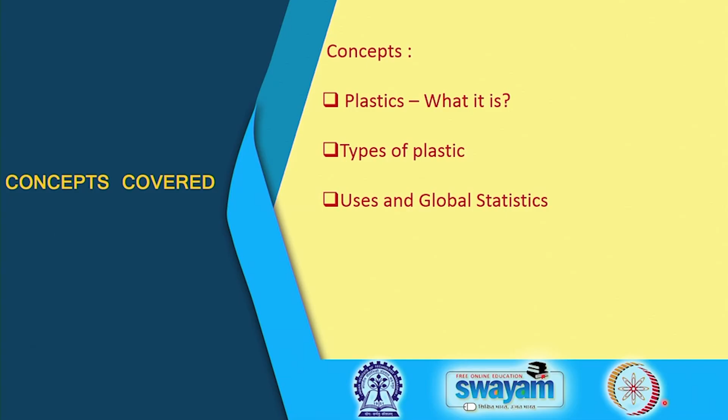So far we have talked about what plastic is, and we started looking at the types of plastic and different classifications based on usage and material. We are presently focused on types of plastic, and in this week we'll also look at usage and global statistics in the next module. This was the last slide you were looking at in the previous module.

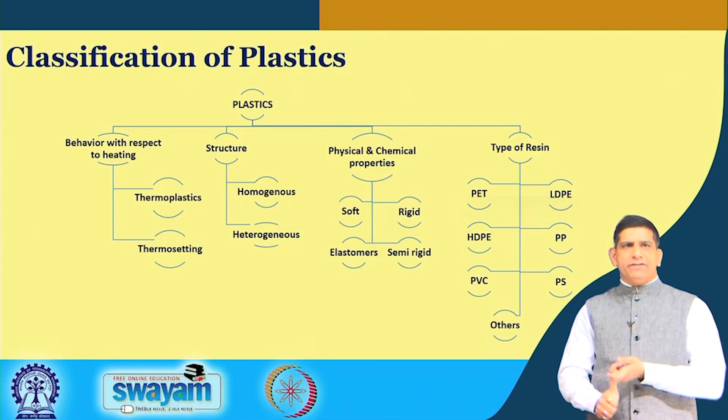When we talk about plastic, you can look at it from a heat perspective, with respect to how it reacts to heat—that's the behavior. We also talked about the structure, the physical-chemical properties, and types of resin. That's where we stopped in the previous module.

Continuing the discussion on thermal behavior: thermoplastics soften by heat and harden when cooled down. If you apply heat, it will soften, and when the heat is removed and it cools, it becomes hard again. So it can be remolded and used as many times as required.

You can remold it and use it for different applications, making different products out of it. So thermoplastics is that particular category.

Thermosetting plastic cannot be reused, so more thermoplastics in the mix is actually better for the recycling industry. Thermosetting plastic is very difficult to reuse—this variety requires great pressure and momentary heat during molding, which hardens on cooling, so you cannot really reuse it easily.

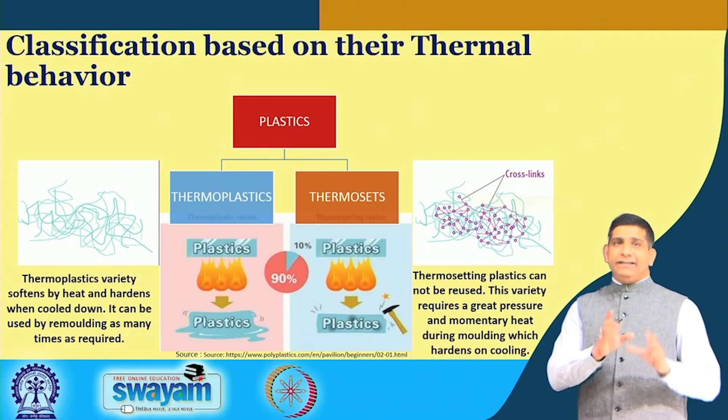Essentially, thermoset plastic can be used in waste-to-energy applications. You can reuse it within the same product, but you cannot make a new product after melting it. So thermoplastics are easy to recycle, while thermoset plastic is better suited for waste-to-energy plants. That's important when looking at different options for plastic waste management.

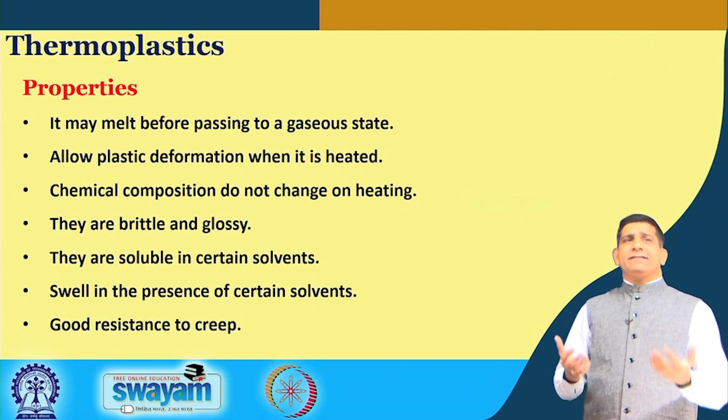Thermoplastic may melt before passing into a gaseous phase, allowing plastic deformation when heated. Chemical composition does not change; they are brittle and glossy, soluble in certain solvents, and swell in the presence of certain solvents, with good resistance to creep. So it can be remolded into different products.

It's highly recyclable, and you get a better, superior finish because of the material property, with high impact resistance. You can remold and reshape it; it has chemical resistance and comes in hard crystalline or rubbery surface options—you can make it hard or soft just by playing with the temperature during processing. It's also eco-friendly to manufacture since it can be recycled much more easily.

What are the drawbacks? It's more expensive than thermoset plastic, since it gives you so many options, and it can melt if heated. So if you're using it in a setting where things get heated up, it can potentially melt while in use—that's where you need to be careful.

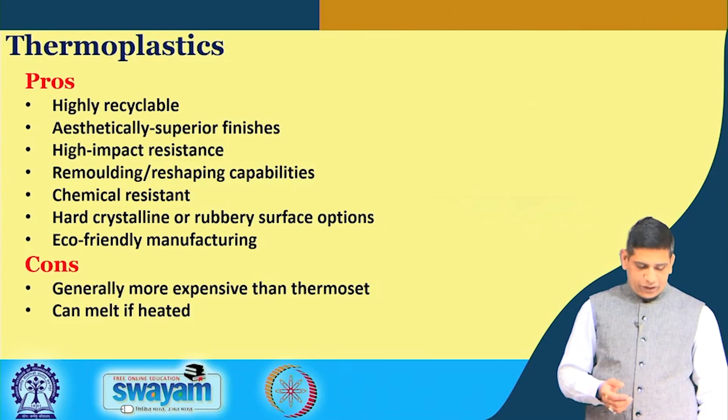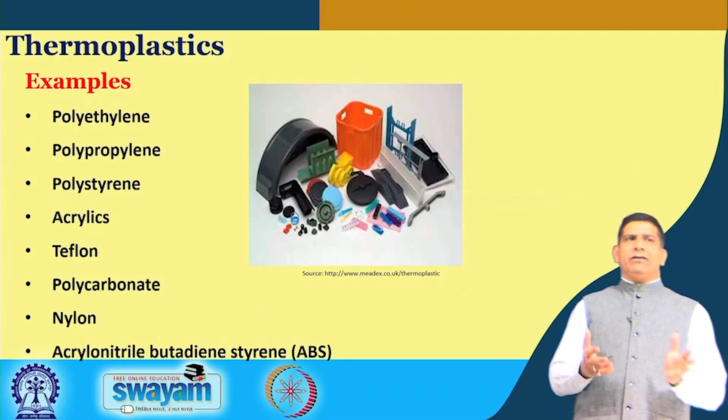Examples include polyethylene, polypropylene, polystyrene, acrylics, Teflon, polycarbonate, nylon, and ABS, which is acrylonitrile butadiene styrene. All these different materials you see are thermoplastics—that's what thermoplastics are used for.

Thermosets are soluble in alcohol and certain organic solvents when they are in the thermoplastic stage. This property is utilized for making paints and varnishes from these plastics.

They undergo an irreversible chemical process, they are durable, strong and hard. You can make beautiful colors. They are mainly used for engineering applications of plastics.

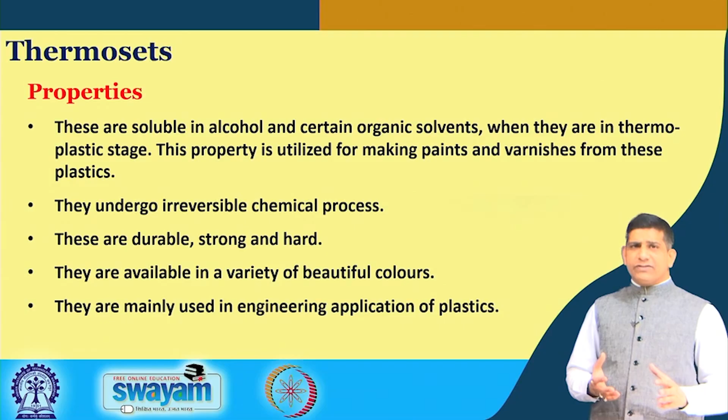So most of the engineering applications you see are mostly thermoset plastic, which is very difficult to recycle, but they are more resistant to high temperature. It will not melt, unlike thermoplastic.

It is highly flexible in design. You can design it in different ways, with thick to thin wall capability. You can make it very thick or very thin.

Excellent aesthetic, similar to before. You can make it look nice, with high levels of dimensional stability because again it does not melt, so it will not have the effect of heat. It's cost effective, relatively cheaper compared to that.

The problem with this is it cannot be recycled, so that is kind of a drawback. It's more difficult to give a good surface finish, and it cannot be remolded or reshaped. So once you've made it, that is it, you cannot really do many things with that.

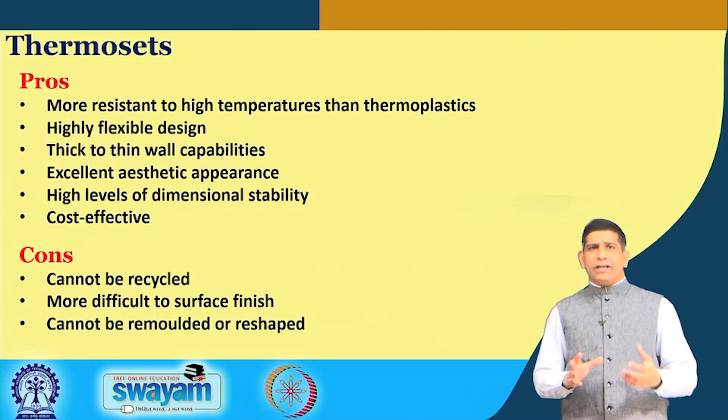That is of course the drawback, but both thermosets and thermoplastics have different kinds of applications, as you saw for thermoplastic. Similarly, for thermosets we use epoxy, polyurethane, unsaturated polyesters, phenolics, and silicone for all those different applications.

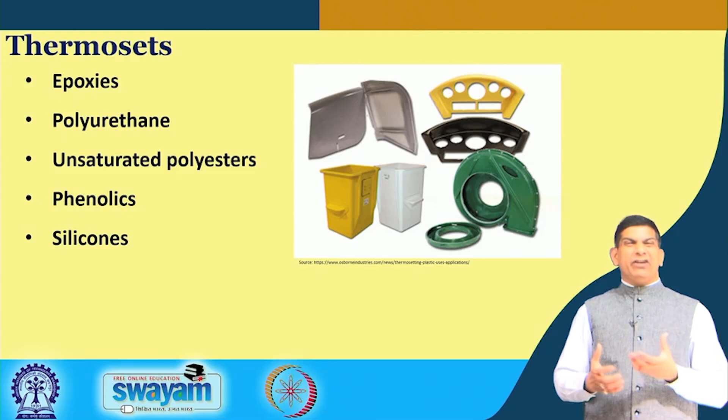There's a lot of use for construction applications and for different machine parts where things may get really heated up, and that is where thermoset plastics are more useful than thermoplastic. So that is based on how its behavior is against temperature.

If you remember the last slide from the previous module and the first slide in this module, we were looking at different types of classification. So if we looked at classification based on behavior against temperature, now in this slide we are looking at classification based on their structure.

So based on the structure of the plastic, whether it is homogeneous or heterogeneous. Homogeneous plastics are composed only of hydrocarbon atoms and exhibit a homogeneous structure. Examples are polyethylene, polypropylene, and polystyrene, which are homogeneous.

Now what is a heterogeneous plastic? These plastics are composed of chains containing carbon, hydrogen, oxygen, nitrogen and other elements, and they exhibit a heterogeneous structure. Examples include polytetrafluoroethylene, polyamides or nylons, polyvinyl chloride, and ABS. These are the heterogeneous plastics.

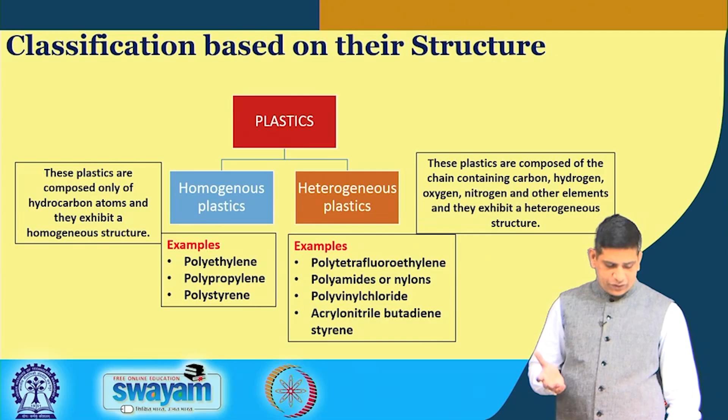So this is homogeneous versus heterogeneous plastic. And then if you look from physical and chemical properties, there is rigid plastic which is very strong, like HDPE tubs, polypropylene cups, and PET pallets, which are very rigid.

Then you have semi-rigid plastic like LDPE films and flexible ducts, where the ducts can move around a little bit, and PVC sheets. So these are semi-rigid.

Then you have soft plastic, like children's toys. If you've looked at toys, those ducks and other stuff made out of plastic, those are soft plastic. Rattles and fishing baits as well, because fishing baits have to be soft.

And then elastomers, like polyisoprene, polybutadiene, and polyisobutylene - those are like elastic plastic. So it has more elastic property; it is not rigid at all, it is actually totally opposite to rigid.

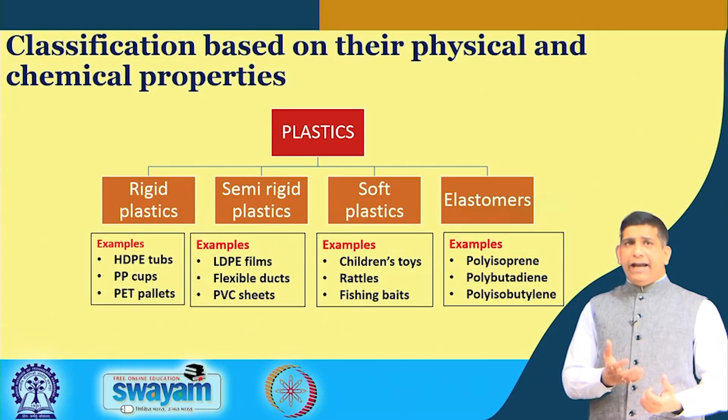So as we go from left to right, we see first rigid plastic, then semi-rigid, soft plastic, and the elastomers. As you move along, the elasticity of the material actually goes up, becoming more and more flexible, and every different type of these plastics has different applications, as we know.

So rigid plastic will be the plastics which have high modulus of elasticity. You know what modulus of elasticity is, based on strength of materials courses? It is the ratio of stress versus strain - stress on the numerator, strain in the denominator - and stress divided by strain gives the modulus of elasticity. It basically tells us how strong, how rigid that material is. High modulus of elasticity means they retain their shape under exterior stress applied at normal and moderately increased temperature.

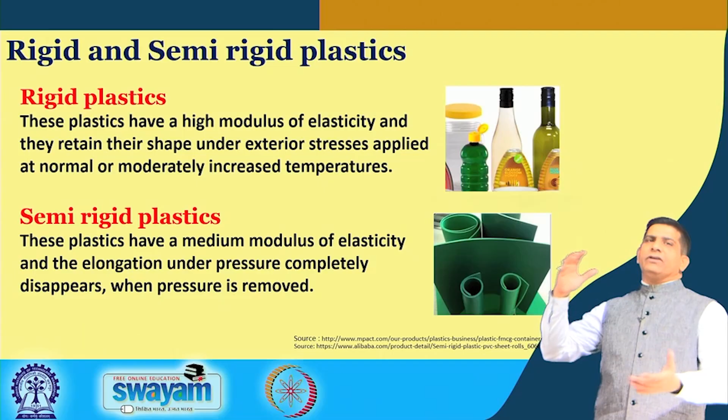Semi-rigid: these plastics have a medium modulus of elasticity. They can elongate under pressure, and the elongation that is there under pressure completely disappears when the pressure is removed. So, it has a little bit of plasticity there as well. You can apply some pressure, things may elongate, and once you take the pressure off, it will try to come back to its original shape and size.

Then soft plastic: this plastic has a very low modulus of elasticity and the elongation under pressure disappears slowly. So, if you elongate it under pressure and then take the pressure off, it will slowly come back to the normal shape and size. That is what the soft plastic is all about.

And then you have elastomers, which are soft and elastic materials with very low modulus of elasticity. They deform considerably under load at room temperature and return to original shape when the load is released. The extensions can range up to 10 times their original dimension. Think about the rubber band and some of these stretchable things you can stretch, and once the pressure is removed, it comes back to the original shape.

So, those are your elastomers. As the name suggests, elasto means they are elastic. Elastic means something which can be easily stretched, and then it tries to come back to its original shape when the pressure is taken off.

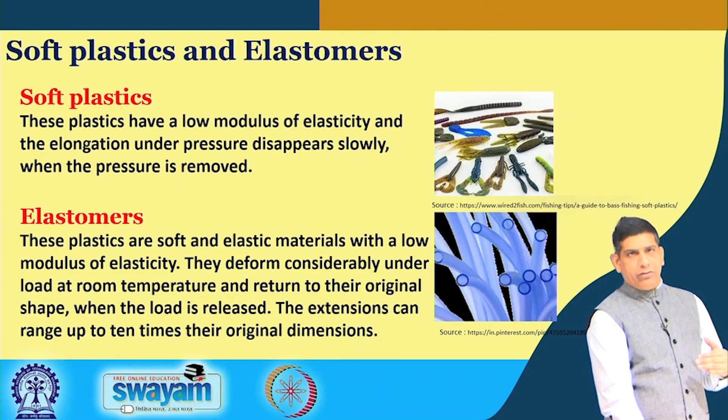If you remember from the first slide of this particular module, we were looking at the different resin types, and in the last module towards the end, I was trying to remind you about the number coding. So, on this slide we are looking at the number coding, where you have code 1, which is PET material, and code 2, which is HDPE. PET is polyethylene terephthalate. HDPE is high density polyethylene material.

We have PVC, which is number 3. Number 4 is LDPE, which is low density polyethylene. Then 5 is PP, polypropylene. Number 6 is polystyrene, and 7 is basically all other plastics, including polycarbonate, acrylic, liquid crystal polymers (LCP), nylon; all those things together are number 7.

So, if you look from number 1 to number 7, as you go down the list, it becomes economically less and less of an incentive to recycle those. PET is the most recyclable material, easy to recycle, and economically it makes sense. HDPE is next, then PVC, then LDPE, then PP and polystyrene.

This number coding is very important when we look at plastic waste, because when we try to manage this plastic waste in a scientific way, one of the things we should look at, and will probably have to look at in coming years or decades, is trying to separate this plastic based on these different codes.

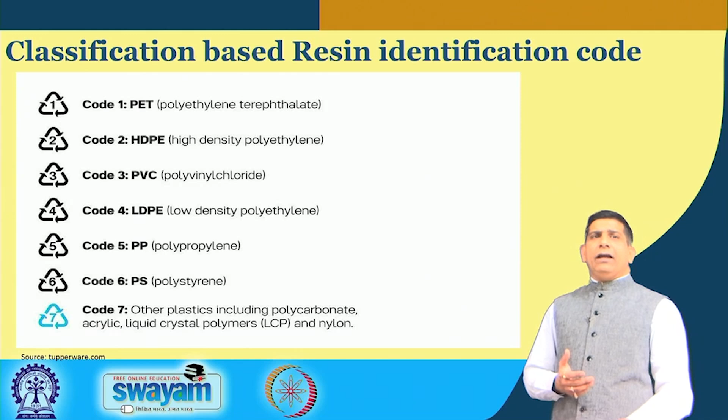Some countries are already doing that; they try to separate PET, HDPE, PVC, LDPE. At least PET and HDPE are separated from the rest, because those two are easily recyclable and economically it makes a lot of sense to recycle those as opposed to others. Sometimes PP, PS and other plastics are better sent to a waste to energy plant. We will talk about that when we go into the waste management part, as opposed to trying to recycle this material.

So, PET, what is that? In some of these materials we will try to look at what PET is. This plastic is the most commonly used on the planet right now. It was introduced by J. Rex Whinfield and James T. Dickson in 1940.

This plastic is one of the most commonly used on the planet. It took another 30 years before it was used for crystal clear beverage bottles, such as the ones produced by Coca-Cola and Pepsi. Initially, what they were using was the glass bottle.

So, the beverage containers were mostly using glass bottles, and if I remember correctly, around 1969, 1970 — it kind of makes sense, 1940 plus 30 is 1970. So, in 1969 Coca-Cola did a study, which we refer to in our LCA course, where they looked at whether it's better to replace these glass bottles with plastic bottles for packaging of this beverage drink. Because they started making these plastic bottles, the PET bottles, and they were lighter.

Lighter means compared to glass, it was a light material. Light material means it will be less heavy. Less heavy means less cost on transportation, and will help them reduce the cost a little bit. So, that was the reason they were trying to go for plastic bottles. PET plastic today makes up 96% of all plastic bottles and containers in the US, and only 25% of those are actually getting recycled.

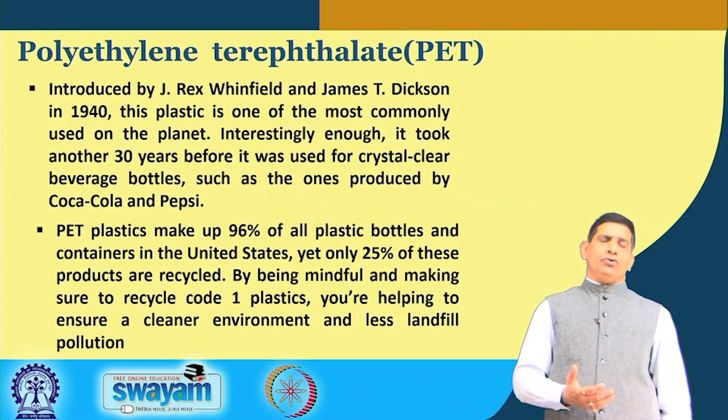So, when you think about plastic waste, of course, in India we have a bigger problem, but other countries are also not doing a very good job at plastic recycling. There are some countries which are doing a wonderful job, but the US, which we probably expect to do much better than 25%... If we can help in terms of recycling these code 1 plastics, we are actually helping toward a cleaner environment, less landfill pollution, and that's very much needed.

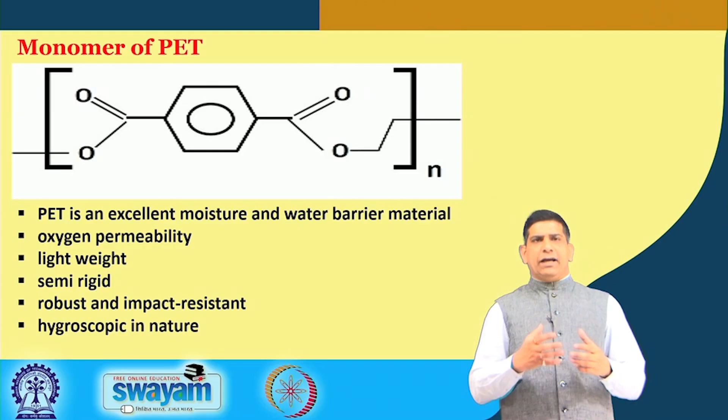So, it's a monomer of PET. PET is an excellent moisture and water barrier material. Its oxygen permeability is very low. It's lightweight. It's semi-rigid, robust and impact resistant, and it's hygroscopic in nature. So, that helps in its usage in the different kinds of applications where it is used. So, this essentially gives you a monomer of PET.

This tomato ketchup bottle is not only PET material. It has PET, but at the same time it has a layer in between as well. We don't want gas movement; we want to trap the gas and moisture movement. It has 2 layers of PET, and in between it has a material which keeps our tomato ketchup fresh. Many times when you buy tomato ketchup, its expiry date will be a year, or sometimes more, from the date of manufacture.

So, to keep it fresh and nice, we have a layer of insulator kind of material in between, and then there is 1 PET, 2 PET, with a layer in between, and that's how those plastic bottles are made for ketchup and similar applications. So, it is actually a mixed plastic; predominantly it is PET, but it's not 100% PET. So, that's what I wanted to point out to you.

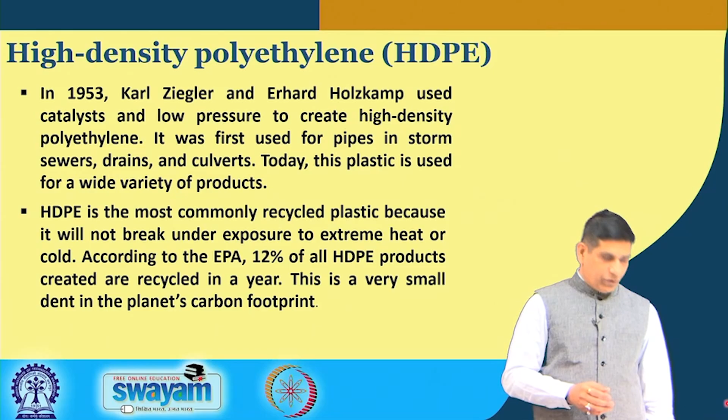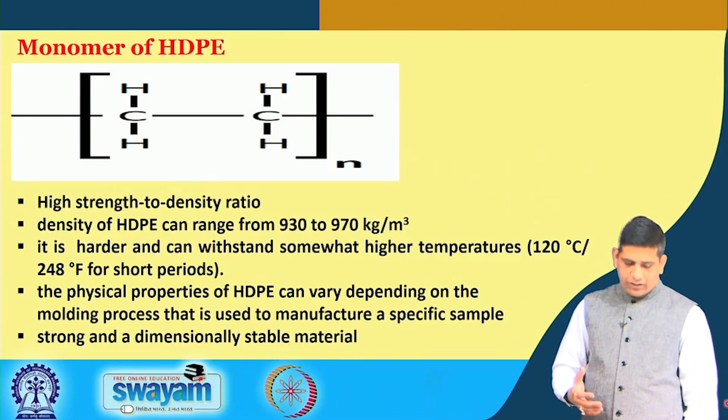So that's why you see HDPE application in most of the sturdy items, like your buckets, big tumblers, big drums. In common applications you will see it for those kinds of containers and milk bottles, your soap containers, shampoo, and all those are mostly HDPE material. Again, you have to look at number 2. Whenever you look at these plastics, look at the number, and if it's number 2, it is HDPE.

Polyvinyl chloride is one of the oldest synthetic materials. It was actually discovered by accident in 1838 by French physicist Henri Victor Regnault, and then again in 1872 by German scientist Eugen Baumann.

On both occasions they found it inside a vinyl chloride flask left exposed to sunlight. So they had the vinyl chloride exposed to sunlight and they found it there. PVC is one of the least recycled materials; generally less than 1% is recycled. It has been called the poison plastic because it contains numerous toxins harmful to our health and the environment.

So PVC is what we need to think about, like how to manage PVC plastic waste in a much better way, so that this tag of poison plastic goes away. So we need to think about how to manage that. PVC, most of the time, cannot be recycled very easily. It can be reused, but it cannot be recycled very easily. So for that kind of material, having some sort of waste to energy process or another process does

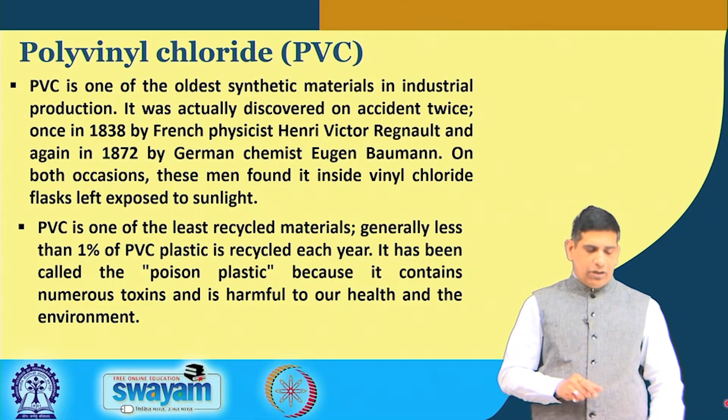help, where you can use this PVC. Again, polyvinyl chloride has a halogen, so you need to be really careful when you use it for waste to energy. You need a very high temperature so that you don't have dioxins and furans being formed, which are formed in the presence of halogens. What are those halogens? Chloride, bromide, iodide, fluoride, those are called halogen elements, which are in one particular group of the periodic table, which we learned about in high school.

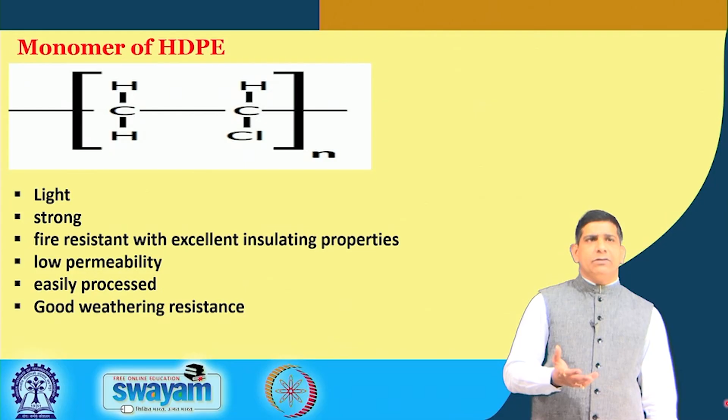If you are still wondering why our course is still discussing the types of plastic and all that, it's essential, because this kind of information is needed to make a good decision in terms of plastic waste management. This background information is needed. As I keep on saying, when we talk about any waste management or any plan that we make, we need to do a good diagnosis of the problem, and this is what we are trying to do. We are trying to get the background information so that we will have a good diagnosis of the problem.

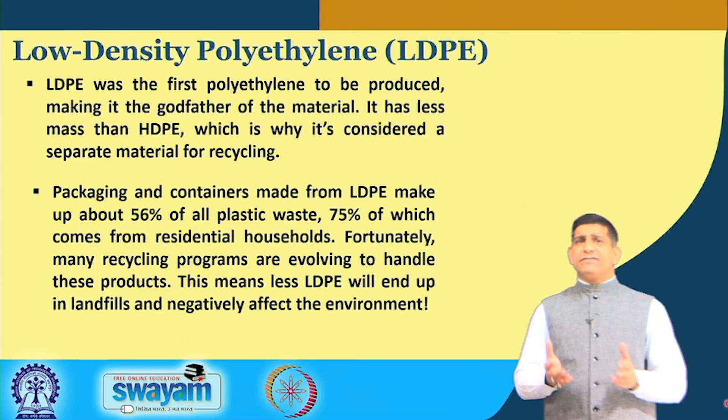Then LDPE. It is the first polyethylene to be produced, making it the godfather of the material. It has less mass than HDPE; that is why it is considered a separate material for recycling. Packaging and containers made of LDPE are 56% of all plastic waste, 75% of which comes from residential households. So a lot of packaging material and containers are LDPE. There are a lot of recycling programs to handle this product. This means less LDPE will end up in the landfill, and that's the goal of any good waste management system.

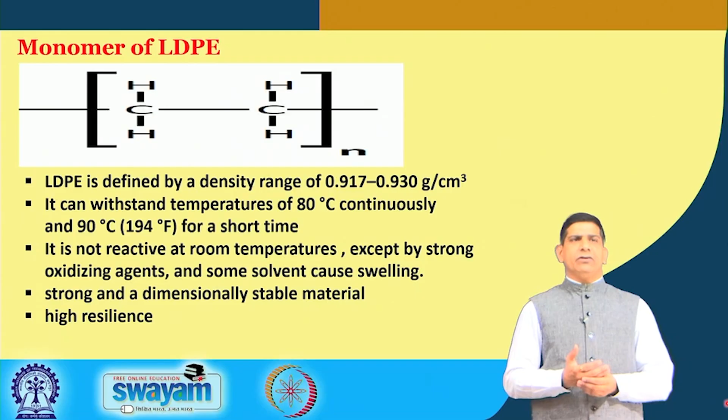Polypropylene: 3% of polypropylene products are recycled in the US. 350 million pounds were collected for recycling over a year, but a lot of this plastic is created and only a small fraction is actually recycled. So polypropylene needs to be recycled, and better management practices need to be looked into.

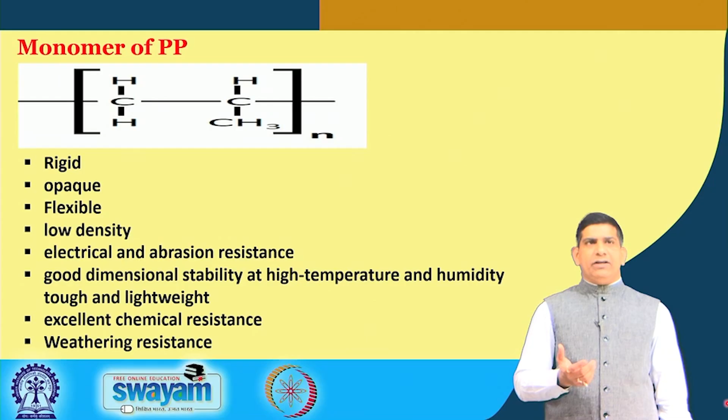It's rigid, opaque, flexible, low density, with electrical and abrasion resistance, good dimensional stability, excellent chemical resistance, and weathering resistance. As you can see, the monomer is a C with 2 H, and then we have a CH3, a methyl group, as well. You use polypropylene for different applications: food containers, furniture, industry applications, cosmetics, medicine and health. So there are different applications of polypropylene in our day-to-day life.

Polystyrene, or styrofoam, was accidentally come across in 1839 when they did some research on polymers. Polystyrene is very lightweight, it can easily be formed into different plastic materials, and it breaks effortlessly.

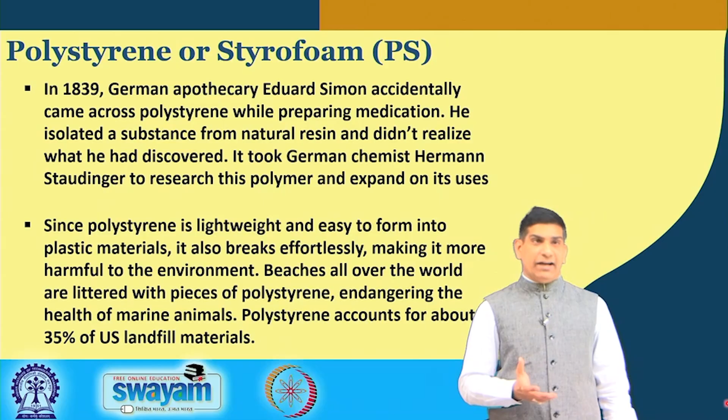It's more harmful for the environment. Beaches all over the world are littered with pieces of polystyrene, so it's endangering the health of marine animals. Polystyrene accounts for about 35% of the US landfill material. So these are essentially styrofoams.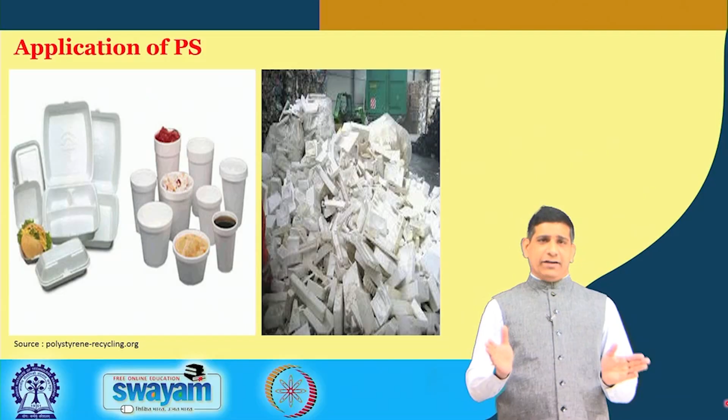And when you go to a restaurant these days, they will ask you whether you want to take the leftover home, and they use this kind of stuff as well. So a lot of polystyrene is used, very poor recycling, and we see it getting into our oceans and water very easily. And so these were all the different 6 types, and whatever is not included in these, we call it other and miscellaneous plastic.

The remaining plastics are polycarbonate, polylactide, acrylic, ABS like acrylonitrile butadiene styrene, fiberglass, nylon. These are different types of plastics. There are different types of recycling programs. Many of these plastics are actually very difficult to recycle. Many BPA, bisphenol A, products fall into this category. It's best to avoid this plastic for food products. We don't want BPA in our food.

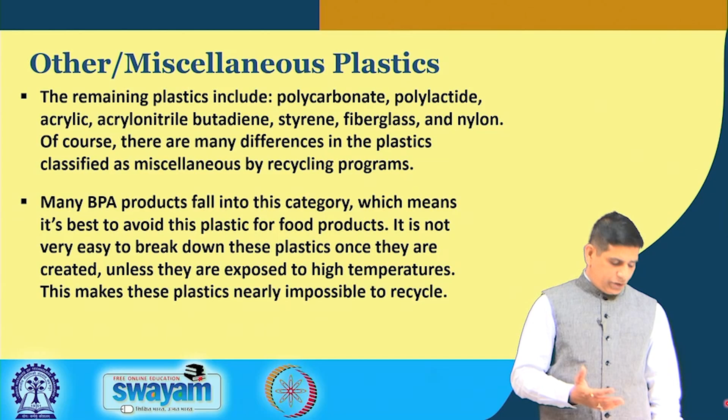It is not easy to break down this plastic unless it is exposed to high temperature, so it becomes very, very difficult to recycle. We'll talk about different methods of dealing with plastic waste. But the things that cannot be recycled, sometimes it's just easier to put them in a different treatment, like thermal treatment. We are talking about plastic to oil. We are also talking about plastic roads. So those things can be used there.

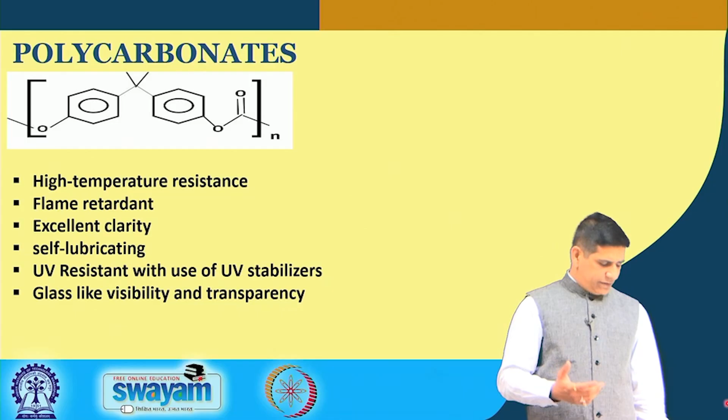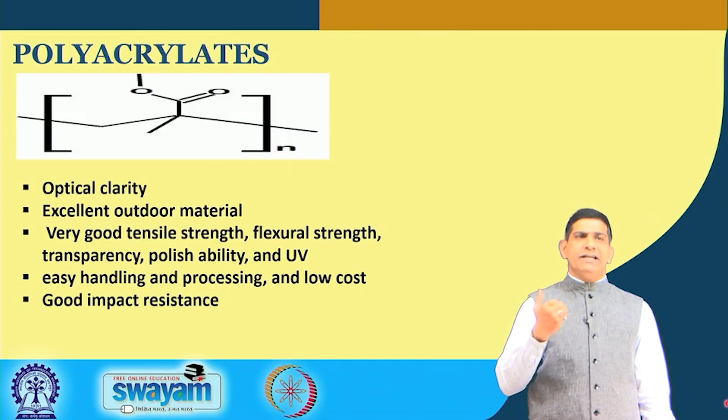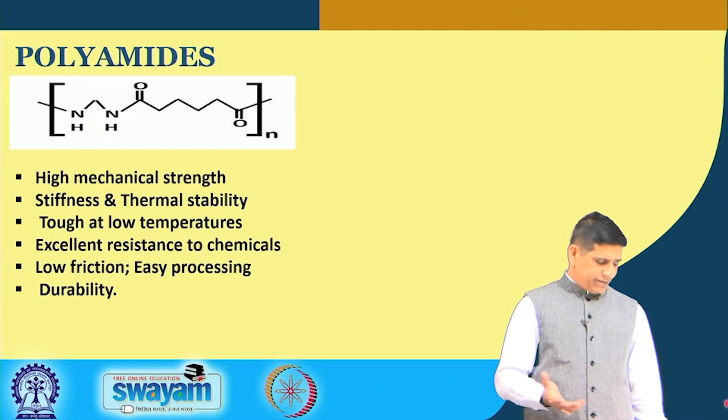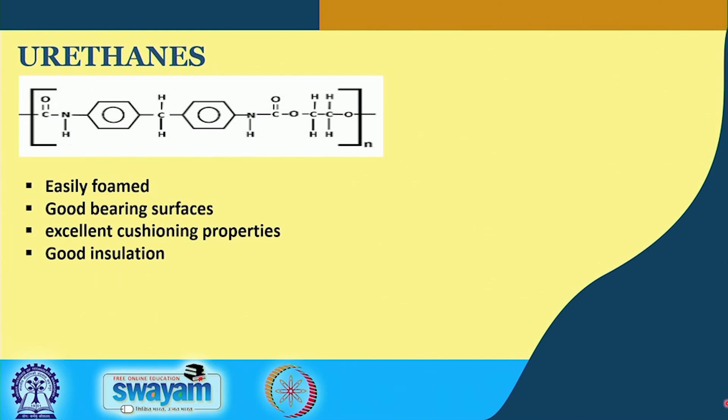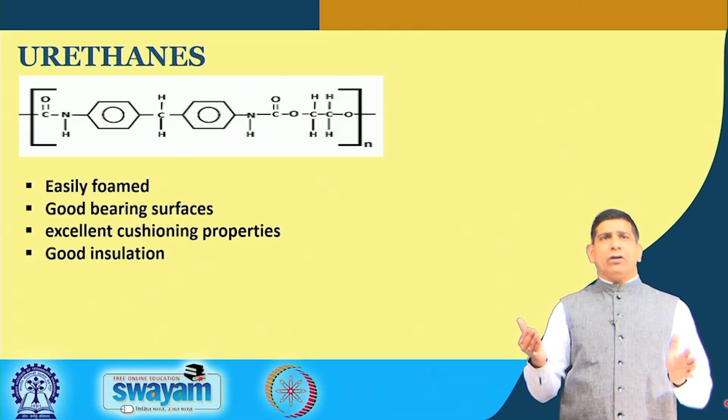So in this particular module, our goal was to look at different types, and that's what we have tried to do. This is week 1, video number 3 that we are completing now. Video number 4 will be the next one, and there we will start looking at the usage. So far the first video was looking at what is plastic, and the second and third videos looked at the types. Now in the 4th and 5th videos, we'll look at the different types of uses and some of the numbers, like how much plastic is produced globally, different types, and how much is produced in India.